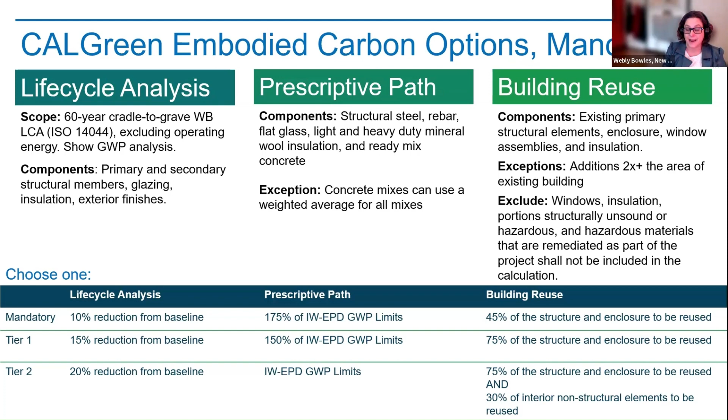And these measures are also being adopted by jurisdictions. In California, similar to Washington, jurisdictions can adopt code at a higher level. So we're already hearing interest in jurisdictions that want to adopt these higher tiers. So we're going to see more of that, I think, as the year goes on.

So starting to look at the life cycle analysis option first. It's similar to an energy model. I think everyone on this call likely knows what an LCA is, but similar to an energy model, it's related to the manufacturing of building products. And we anticipate that this is going to be the most popular option. And similar to an energy model, it's more of a design-based credit. It doesn't actually have to show that what was installed matches what was designed. But I'm going to show you why we should care about that.

So for the documentation, we need a summary of the GWP analysis that's produced by the software. We need these CalGreen worksheets, and that's also signed by the professional of record. And that signature of the design professional of record is kind of a key component here, because we know that architects are kind of the glue in all of these projects. And so these measures are really relying on the design professional to make sure that everything is designed and constructed as intended.

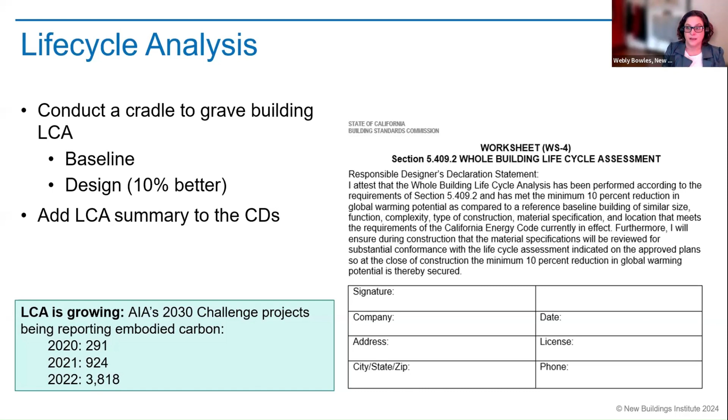The other component here is that you have to include an operations and maintenance manual that includes this information and provide that to the owner at the close of construction. So those are just some of the details within the requirements.

Is that one? Did I skip a slide? Okay.

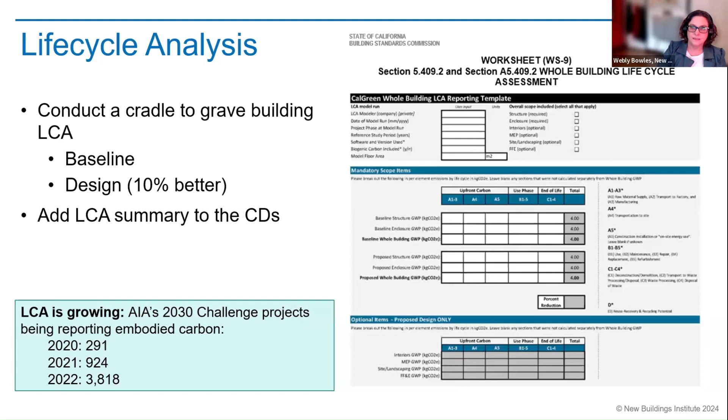So to set it up right, we want to make sure that all of the requirements are in the design, in the construction documents. And while CalGreen doesn't actually require that all of these things are included, this is what's going to set you up for success. So for specifications, we want to include the requirements in Division 1, include the EPDs for those key products that you have identified within your building LCA, and incorporate the LCA worksheet within the drawings.

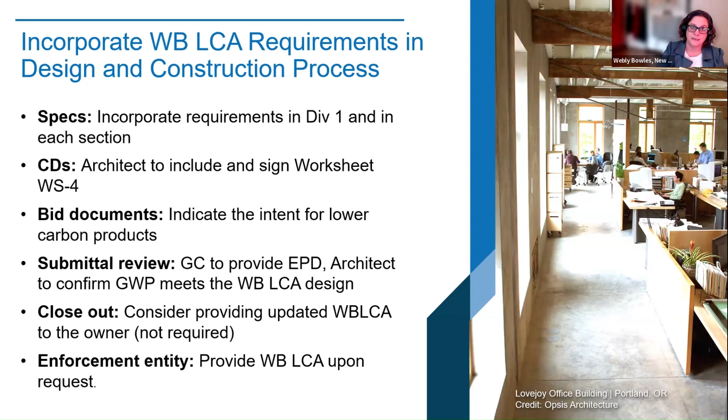Within the RFP, you want to make sure that embodied carbon reporting requirements are highlighted. And then in bid meetings, we also want to make sure that we're stressing the importance of this. And construction administration is going to be important for this as well, to make sure that the contractor understands what's in the specifications and how to implement it. And then at closeout, we want to make sure that we are providing that operations and maintenance information to the owner as well.

So for building reuse, there's certain components for reuse. It's existing primary structural elements, enclosure, roof and wall framing, insulation, and exterior finishes. There are a number of items that can be excluded: windows, insulation, and anything that's structurally unsound can be excluded from that. The other option around building reuse is that you can have an addition, but it can't be more than 2 times the area of what's being reused. So this is kind of the main thing that might make people not use building reuse as an option.

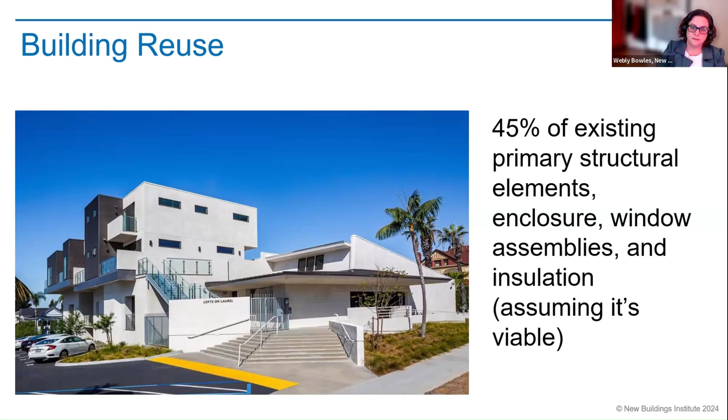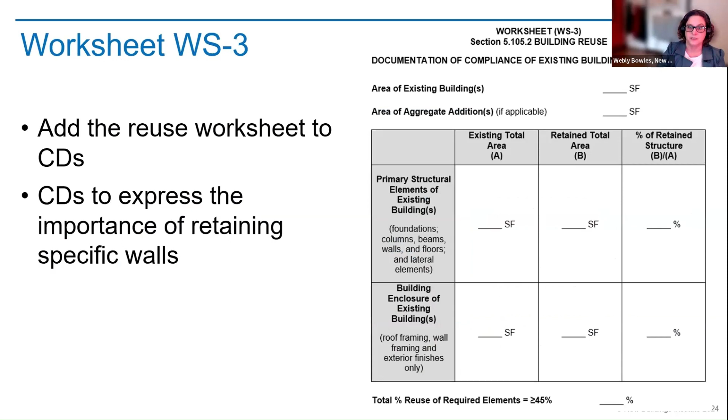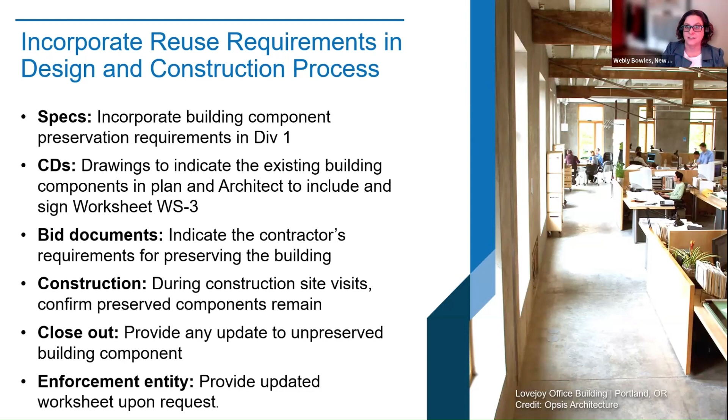So the calculation for this is pretty similar to LEED. It is looking at the area that is being reused, and there is a worksheet associated with it. And similar to the building LCA, it is a design related measure. So we basically want to follow the same process to make sure that we're including it in the specifications, the construction documents, the bid documents, and during construction, we want to make sure that we're keeping all of those materials, and nothing extra is being removed unless changes happen. We might find later on that something is not as structurally sound as we initially thought.

Getting into the third one, the prescriptive path. This is aligned with Buy Clean California, except it also includes concrete. So this requires that specific products are at or lower than the specific GWP limits that you see here on the screen.

These limits are set really high. They're above industry average. So what Megan was presenting around GSA, these are way above that. The intent is that this is being introduced for the first time, and it should be easy to comply with these. And we anticipate that over time, these values will be coming down.

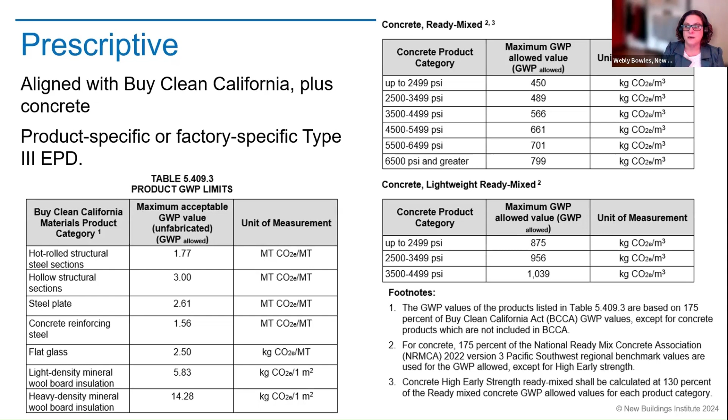So to comply with the requirements, the project teams will collect and report on Type 3 environmental product declarations, either product specific or factory specific, both are allowed. And it's not a design credit like the other two, but there are design actions that need to take place to make sure that we're successful in the construction phase.

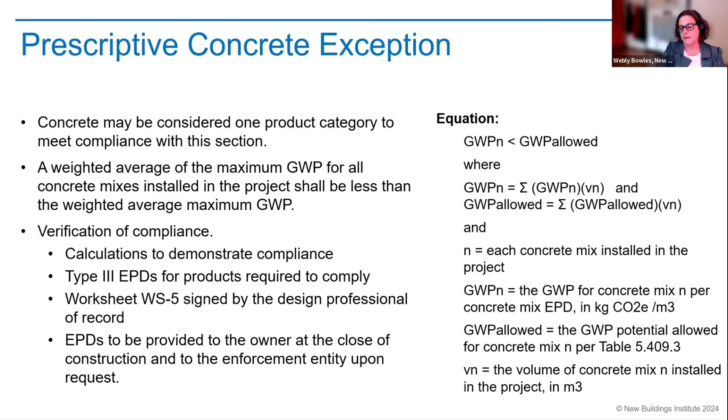Since concrete is a unique product, each mix doesn't have to meet the specific GWP limit for each individual strength class, but the contractor can apply a weighted average approach where on average, all the mixes meet that GWP average limit. And this is a similar process which was used in Marin County for their low carbon municipal code. And there is a worksheet for this that the design professional will need to sign.

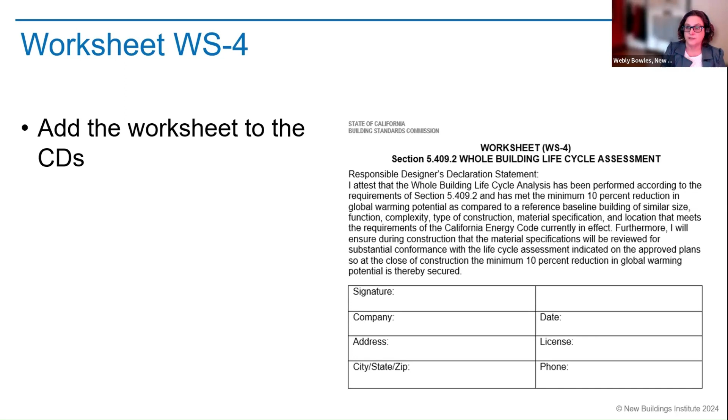And since it is construction related measures, the architect will need to work closely with the construction team to confirm compliance throughout the process. So again, very similar process, make sure it's included. Requirements are in Division 1, the individual specification sections, other components of the CDs, including the worksheet, the bid documents, submittal reviews to make sure that the right products are being installed, closeout providing those EPDs to the owners so that they have them, and then that enforcing entity also has access to those EPDs.

And there is some small print at the bottom of the screen, which is really hard for me to read too. And it says that the enforcing agency may require inspection and inspection reports in accordance with sections 702.2 and 703.1 during and at the completion of construction to demonstrate substantial conformance. Inspections shall be performed by the design professional of record or third party acceptable to the enforcing agency. So this is like this second layer of enforcement to make sure that there can be a third party review if needed.

So I want to talk about compliance and enforcement a little bit. Since this is new to the code officials, there's some trepidation around this. It's a lot of new information for them to learn. On that last slide, it said that the enforcing agency may require reports, and reporting is required to be provided in the language so that it can be provided separately.

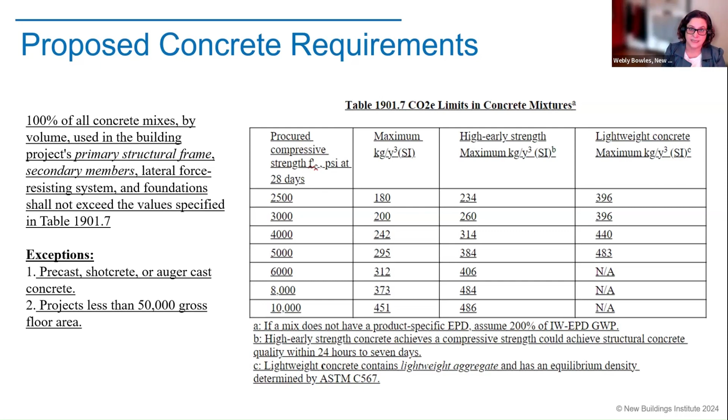So 100% of the concrete needed to meet the weighted average GWP as seen in the table. As I talked about, that weighted average component, you can see that calculation here. It's very similar to Marin County and to what was ultimately in CalGreen. And that's the preferred approach because it allows that flexibility.

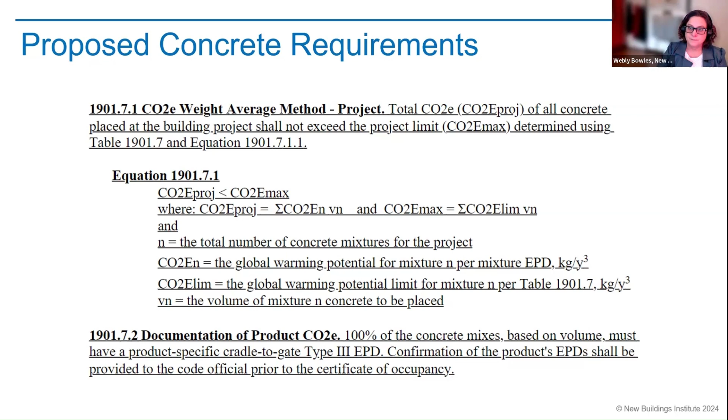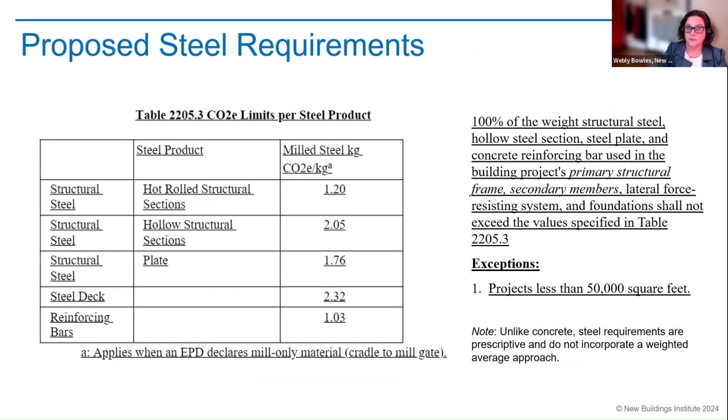And then the steel proposal. These are the steel limits. They're pretty easy to achieve using US-based steel. Nucor Seattle was not in opposition to this because their steel was within range, and we did bring them into that discussion.

So since the proposal died for this upcoming code, we're hoping that there is interest in this code and that we'll either be able to pass it at the state level at this next go around, or we can continue working with Seattle and have a little bit more time, have some working groups define it, basically using lessons learned from California. And also, I know that a lot more design firms in Seattle are using low carbon concrete mixes and are learning a lot through that process. So we're hoping that will be able to move us forward.

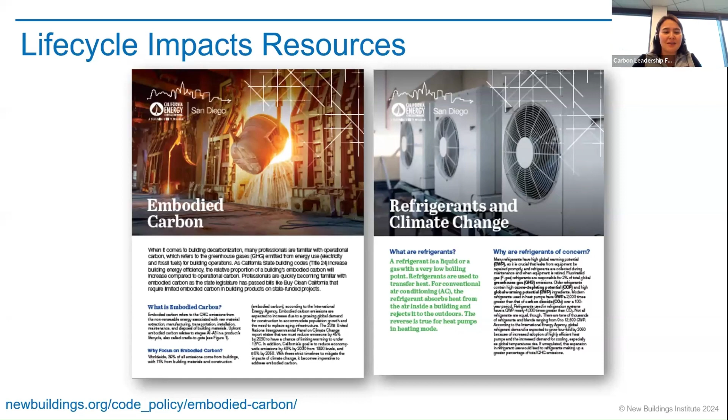So big changes in California, which I know many people on this call, even though we're Seattle based, do some projects in California. So it's really great to hear about that. And hopefully we'll get some motion going on in Seattle or Washington over the next year or so.